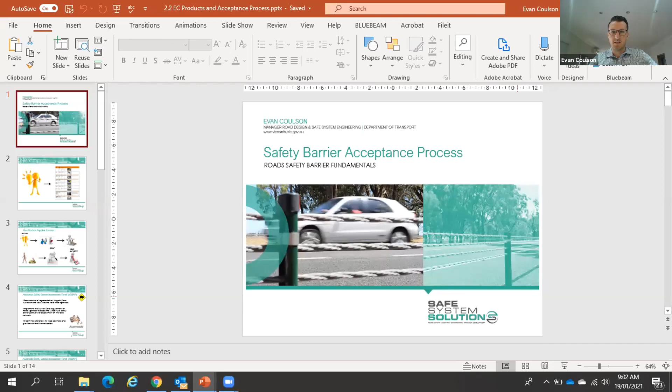No worries. Thank you, Ken. I will share my screen now. Screen share. Alrighty. And then let's get into presentation mode. Alrighty, hopefully everyone can see that.

So I've got 4 presentations, all of different lengths, but basically I'll be going over the acceptance process, what it takes to get a product from an idea to on the accepted list so that someone can use it during the design and installation. I'll then go into how we test, how we evaluate those products during the acceptance process. And then after that, we'll get into some permanent barriers, all the different types and some key features of those, and then a bit into temporary barriers at the very end.

So I do use up sort of the full 2 hours, so I apologize if I feel like I'm rushing, but hopefully it leaves a little bit of that question time in between, which I think is more useful. So as I said, how does it go from an idea to a list of accepted products? Now, this is generally the process.

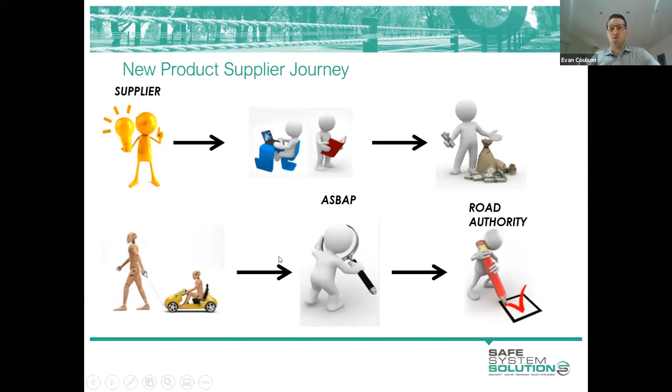A supplier, normally someone out in the private industry, has an idea. They will develop it, check the feasibility of it. They will invest heavily in this process. They will then crash test the product. So all of this happens generally by a private company. There's generally some intellectual property with it. They go away and crash test, and they package everything up and they submit it to ASBAP and then to the specific road authorities. So I'm going to talk about sort of these last 2 here mainly.

So the first one, ASBAP, the Austroads Safety Barrier Assessment Panel. So before this group was put together, each of the road authorities were doing their own assessments. So we're each checking the crash testing, checking the quality of installation, the product, how it goes together, how it could get misused, everything. And we realized it's going to be much more efficient and actually a much more stringent sort of assessment to bring everyone together and do it as a panel.

And so the Austroads Safety Barrier Assessment Panel, ASBAP, consists of someone from each of the road authorities from Australia and New Zealand. And basically we go through and we evaluate each of the new products that get submitted to us. We meet 4 times a year. It used to be more.

We found that that's probably the right balance, meaning that if someone submits a product, then it will go to pre-assessment by 1 or 2 of the experts, and then it will come back to the panel. So it can take 3 months to 6 months, depending on when they submitted it, to be fully assessed. But we feel that when it happens faster, we miss things, and we all actually have our normal jobs as well to do. So 4 times a year, and it can take anywhere between 3 to 6 months to get a new product approved.

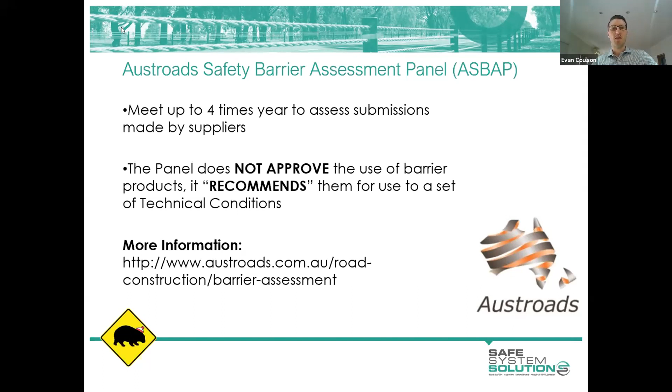The suppliers put together a pretty big package of information, and they submit it through. And basically at the end of it, if they're successful, a letter is sent to them that says, yes, your product has been recommended for acceptance. Feel free to hand this on to state road authorities. And here is a technical conditions of use, a list of values and criteria that we identified as part of the assessment, and that we think is how the product should be used to make sure it meets that MASH performance.

Now, once Austroads is done, and this is a very generic process, but it's fairly similar for each of the states. Once the Austroads assessment is done, so they've handed over a letter to the supplier, then they go and approach the state road authority. So the product or variant is then submitted to the road authority. So that could be DOT, RMS, QTMR.

The road authority does their own internal check. Does the product add value? And there are such things as too many variants of a specific product. And there are also other elements around Western Australia having very, very regional locations where they just can't attend within a reasonable time frame, and they need to be able to manage what assets are out on their network. So the state road authority asks, does the product add value on top of what they've already got?

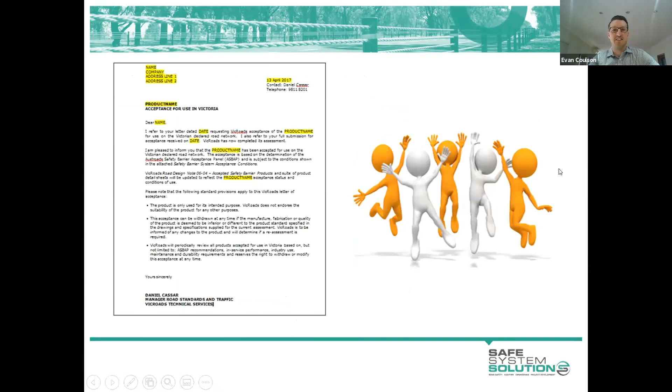Alrighty, so the supplier gets a letter from the relevant road authority. That's an example there from Victoria. They celebrate, and then it goes on to a list. And that list could be in a PDF, like I'm showing here in Victoria, or it could be on a website, like they do in New South Wales.

So the list of accepted safety barrier products is shown on the website. They have split it up by permanent, work zone, temporary, terminal, and crash cushions, gates. So they have a couple of separate areas for the different types of products, and we'll go through each of these a bit later.

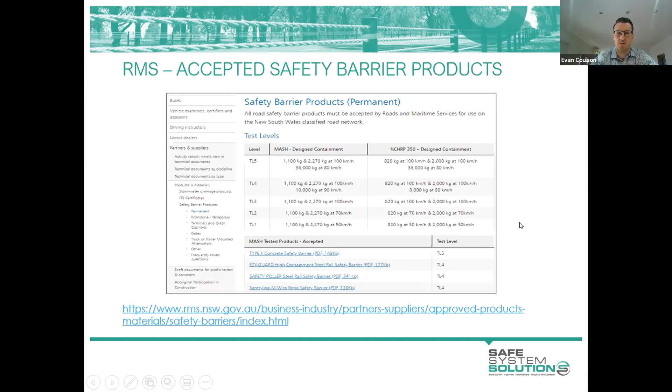They'll just have a list of the product name and the test level, and basically all of these titles link directly to the TCU, the technical conditions of use, the document that outlines exactly how that product should be used. And so here's the example.

Click on MASH TL3 Brifen, and what will pop up is the RMS acceptance conditions. Now, yes, it's New South Wales branded or RMS branded, but it's very much similar to the Austroads TCU. And it's a similar practice that we're now adopting down in Victoria, to directly link to the Austroads TCUs. Again, just a bit of saving time and a bit of harmonization benefits. But you've got your full list on the left on the website, and then you can click through to each of them, and you'll get the detailed conditions.

So in summary, with acceptance, don't use a product that's not on the accepted list. Even if the manufacturer has it up on the website, it may have gone to Austroads. There may have been some nuance in the testing where it wasn't pinned correctly, or it wasn't meeting MASH, and it hasn't been accepted. Or they just might have not crash tested it whatsoever and are claiming that this is the best product that the world's ever seen, and it does this and that. It just needs to go through the process. We need to have the relevant SMEs looking at it, doing that due diligence. So you really shouldn't be using a product that's not on the accepted list.

And if you are, you really need to know that you're taking on that assessment. You're saying, I've assessed it in accordance with AS 3845, and we'll go into the relevant standards next, I find it suitable. And I just don't think, if you're saying, well, I read a manufacturer's website or a supplier's website, that would be a good defense. So don't use it unless it's on the list. Always check the latest list. Don't modify or use the product differently.

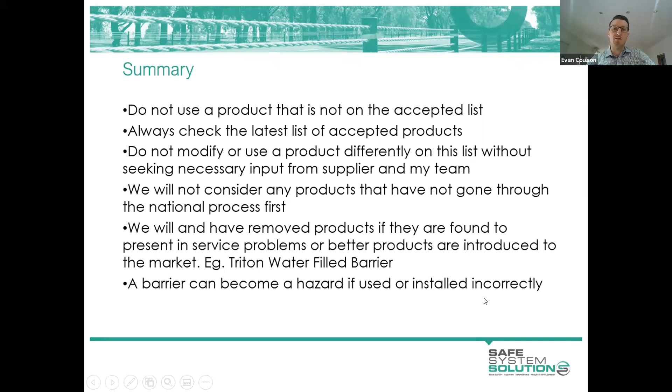And each of the state road authorities can always remove a product if it hasn't been working on site, not necessarily crashworthiness, but it hasn't been installing well. There seem to be maintenance issues or repair issues. And so products can be removed by the state road authority at any time. Alrighty, well, that is the first presentation, the accepted list.

I'll jump over to Ken. Are there any sort of questions that have popped up? No, nothing yet, Evan. Right. So keep motoring along. I think people will have some questions in some of the others.

Yep. No worries. Alrighty, so we now understand, I guess, the process for a product to get on the list. The next part I wanted to talk about is, what is that assessment? What performance are we checking for? What standards are we checking to? What are we actually looking at as part of Austroads, ASBAP, or as part of a state road authority? And this is the bit where I'm going to get into a bit of crash testing and the terms of MASH and 350 and stuff like that. So how do we determine if a product actually redirects and contains a vehicle?

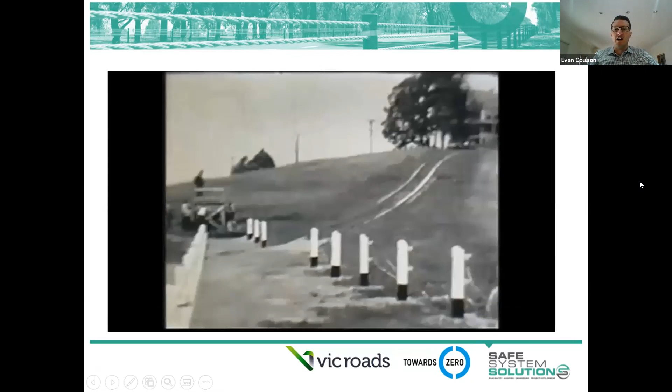Now, hopefully for those that have a good internet connection, this is a video of some very old crash testing. It's basically showing a black and white video of a car rolling down a hill and hitting what looks like a wire rope safety barrier, or a couple of posts with some cable joined between them. The principles are really still the same. What vehicle do you roll down the hill? What speed do you try and achieve when you hit the barrier, and what angle?

And, you know, they've made those subtle decisions when they crash tested that. Yes, it's pretty primitive. They've just rolled it down a hill, but they've still made those three key decisions. They've chosen a vehicle type. They've tried to achieve a certain speed, or it could have just been how big the hill was. And they've chosen an angle. They've installed that barrier that way so that the vehicle would hit it at a certain angle. And that is essentially the main matrix of tests, a combination of different vehicle sizes, angles, and speed.

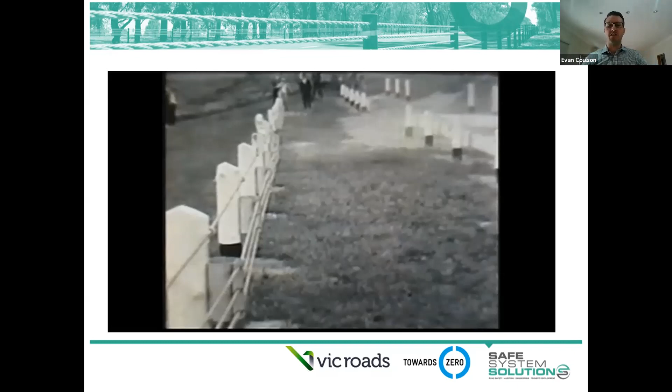So where do we get this information from? Now, there have been crash test protocols, so how you crash test a product, around for a while. However, the names or the initials that you'll know the most are NCHRP 350. So this was a report completed in 1993 to look at an updated protocol.

And finally, MASH, the Manual for Assessing Safety Hardware. And these would be the latest. The first version was out in 2009, and the second version out in 2016, with some minor additions to wire rope and wire rope on verges. So nothing major, but just trying to, I guess, extend some of those unique installation scenarios.

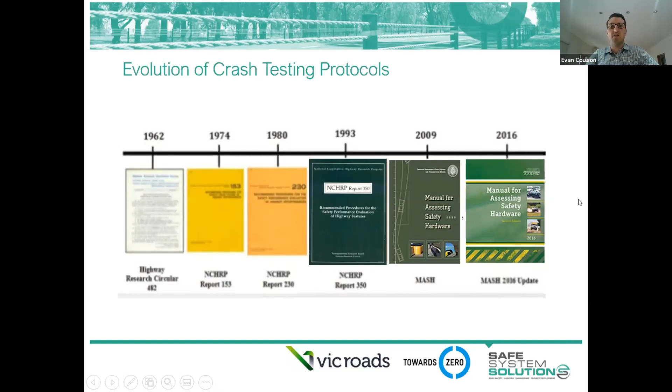These are the protocols, and these ones here that I'm actually showing are just American ones. And we use these, but we actually need something to bring these all together and say that we use these. Australian Standard / New Zealand Standard 3845, which is road safety barriers. This is the document that pulls it all together.

This document talks about how to determine if a product or a barrier is suitable. It talks about the testing and how you need to install it and everything that should be evaluated before you accept a product. And we use, or Austroads use, this standard very closely. So our whole evaluation process is set around this, and it does go into a lot of detail.

However, it does reference three documents: NCHRP 350, which was that American crash test protocol from the last slide. It references MASH, and it also references the European standard, which is EN 1317. It does call MASH out as the basis. So as the new update in 2015, it says MASH shall be the basis for all testing and evaluation. However, it will consider products that have been tested to these other manuals.

Now, why use an American or a European standard? Why not go away and develop one ourselves? Well, the reality was that most of these companies designing or innovating new products are in America and in Europe. That is where the market is much bigger. That is where they see the profit for their investment.

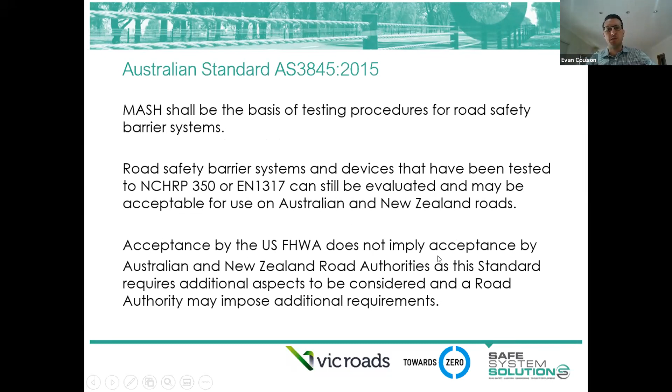The FHWA are assessing a product to their standards. They're not saying that it meets AS 3845. And so we really need to make sure that that check is done, which is why Austroads ASBAP has been set up.

Why do we crash test? Well, really, we want to understand how or if these products are likely to work in the real world. Now, there are infinite possibilities out on site. A range of different vehicle types and sizes and weights, a range of speeds, a range of angles. We can't crash test everything or every scenario. And to that extent, it means that not every product is perfect because it hasn't been tested in every possible scenario.

What these protocols do is they set practical worst case scenarios. So they try and set an upper limit. What is the reasonably large vehicle, reasonably high speed and high angle? And what it also does is that each of the products are tested consistently. So we can have some comparison, some understanding about how concrete works versus wire rope or guard fence, because they're being tested in the same way. So the reality is that these protocols set that limit, and if someone can pass that, then we're pretty comfortable that they can pass a worst practical case.

So how do we crash test those three components? Vehicle. Now, how do we pick a vehicle? This diagram up the top shows some data from Victoria from a couple of years ago. And I guess it's just useful to highlight, and you'd have similar graphs in other states and probably similar graphs in the US, but this is a graph that shows vehicle weight on the bottom here, so 0 all the way up, and I haven't extended it, and the amount of registered vehicles.

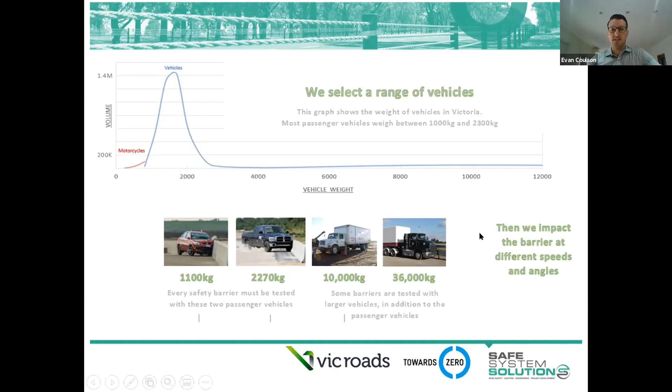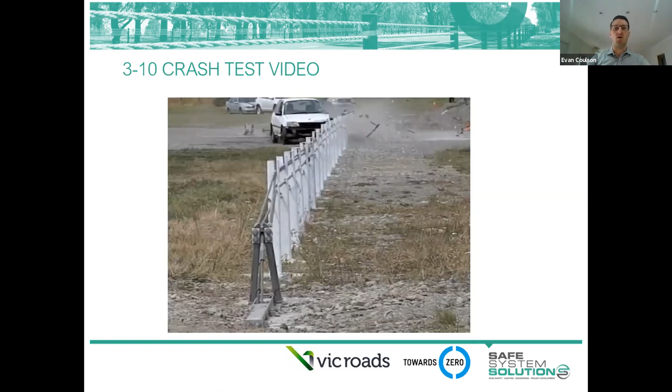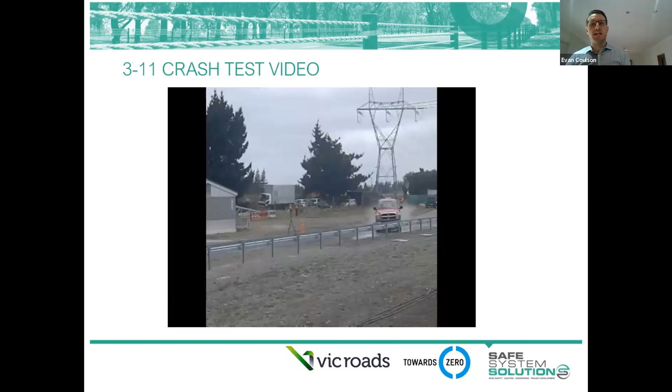The next one, the large passenger vehicle or SUV. We can see a difference from NCHRP 350 to MASH, taller bumper height, larger weight. And again, this is testing that maximum sort of load from a passenger vehicle. It hits high, it hits with a large amount of energy, and it's the most likely, unless you start going to TL4 and TL5, to breach through or overrun the barrier. So hopefully with those two tests, we know about underrun, we know about overrun, and we've also tested for that sort of large impact energy.

Once you move above that, we go into the 8-ton or 10-ton now. So TL4 has gone up, and then into the 36 tons. So there is a TL5 and a 6, and I think I'll come back to that in a minute. These are two different tests. So there's the 36-ton trailer truck test, something like this over here on the right. And there's also a level above that, which is a 36-ton tanker. And while their weights are the same, their behavior during impact is different.

This one on the bottom right, which is the TL6, the test level 6, has a movable liquid load. And so when it impacts the barrier, it actually behaves quite differently because you get these multiple impacts. You get the front compartment impacting, the back impacting, and then as all that load flows across into it, you get that third very high impact, which is much more likely to tip over a shorter barrier.

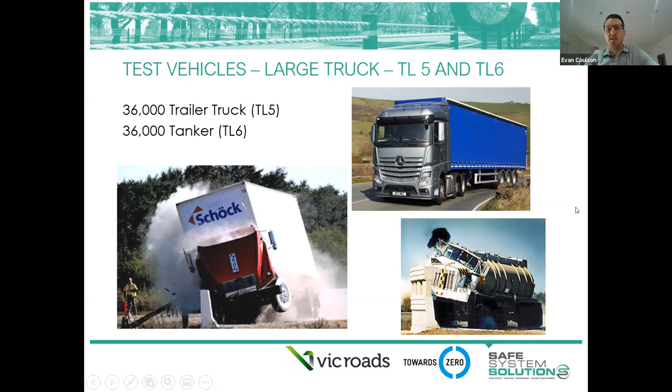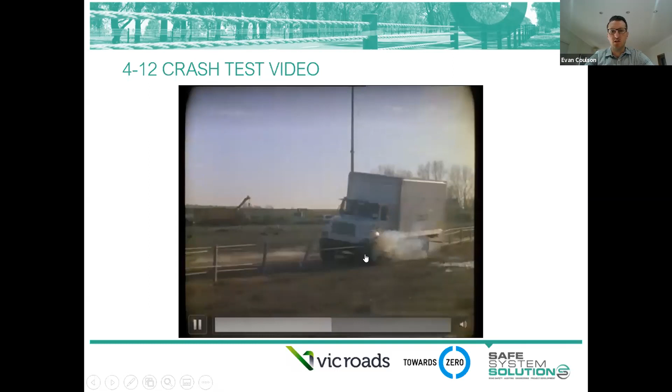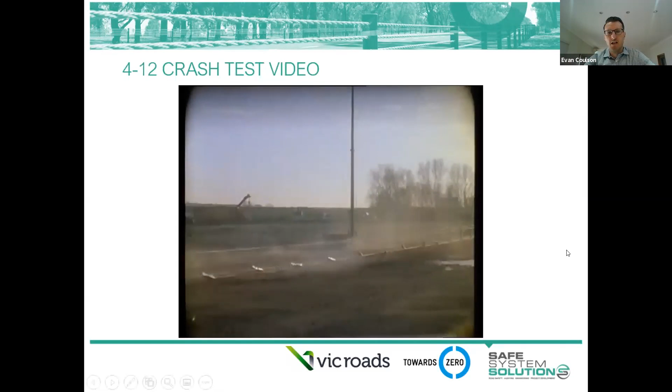For other than concrete, the only real products that get to TL4 are your Thrie-beam and your wire ropes. The idea being that you can spread the rope out, spread the contact area around. You're still protecting for the small car, but it's still tall enough to protect for those larger vehicles. That's one of the big benefits of wire rope, the fact that you can spread it out and capture a range of different vehicle shapes and sizes because of how far apart you can get the top rope and the bottom rope.

We pick an angle for each of these: 25 degrees for the 2 passenger vehicles, and slightly lower for the trucks. These angles are based on the protocol, and the protocol is based on crash statistics. America looked at 4,000 runoff road scenarios and found these angles were the worst practical cases. Yes, you get some angles higher than this, but most, that 85th percentile of runoff roads, leave the road at around 25 degrees.

So putting those together: TL1, the 2 passenger vehicles at 50. TL2, the same 2 passenger vehicles at 70. TL3, the same 2 passenger vehicles at 100 - this is the most common crash test that people are aiming for. TL4, you still have to do the passenger vehicles at 100, but you add on the 10-ton truck at 90. TL5, passenger vehicles at 100 and add on the 36-ton truck at 80.

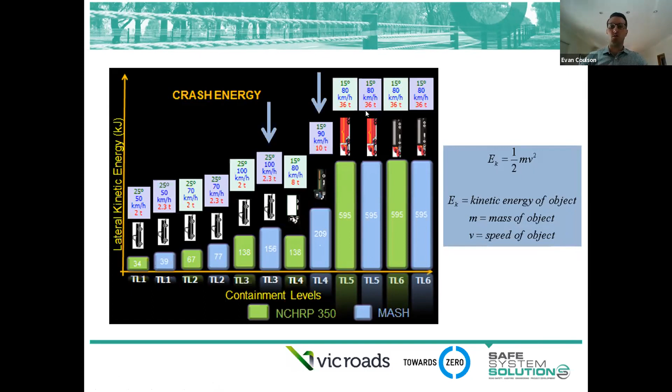Now, I talked about longitudinal barriers. So all those tests before about the small vehicle and the large vehicle, the speed and angle, that's just for the midsection of the barrier. There's a whole new matrix for the terminals. Same principles: small car and large car, straight on, at an angle, at the critical impact point - the place that creates the highest occupant risk or severity - and the length of need, where that terminal begins to redirect. I'll go into that a bit later throughout these slides.

And then on the reverse - if you're going from something stiff into a flexible terminal, not an issue - but it's where we go from a flexible barrier into a more rigid terminal that you get this effect called pocketing, where they're coming in, it's deflecting, and they might be dragged into a rigid back. That could be a crash cushion on a plastic temporary barrier. That combination would just not work, because the plastic barrier deflects and it would be coming in right into the back of that pinned crash cushion. That's why that combination isn't accepted, because they just would never be able to pass test 3-39.

So again, a big matrix of tests for the terminals. Similar with crash cushions, the only real difference here is that it adds in a 20 degree as well. Because these are generally redirective right from the beginning, there is this 20 degree angle impact right on the nose. Whereas in the previous ones, there is an assumption that it would just sort of go through the barrier or through the terminal. So 15 degrees actually has the greater risk being passed on to the occupant, whereas in a crash cushion, 20 would be the worst.

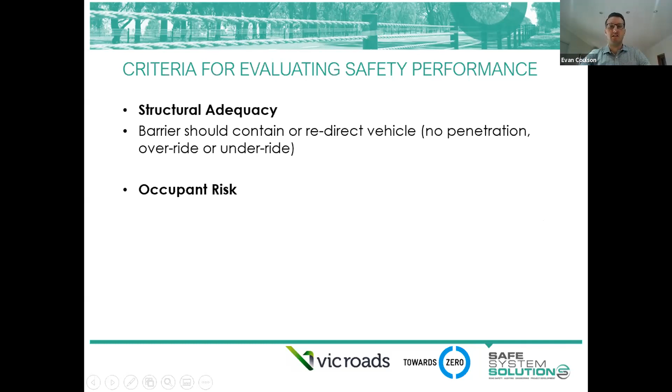The second is occupant risk. Does the driver, or do the other occupants in the vehicle, actually survive? We measure this using gyroscopes and various instruments throughout the vehicle to make sure the compartment isn't breaking, there aren't any bits spearing into the occupant compartment, and also that the occupants will survive the deceleration - the G forces on them as they go from 100 Ks down to whatever their exit speed is.

And then finally, post-impact trajectory. Does the vehicle leave the barrier after an impact at a reasonable angle? It's preferable that the vehicle trajectory does not enter the adjacent lane. So it obviously has to leave at some angle - you can't just have it stop against the barrier. But we do require that it leaves the barrier at a reasonable angle and isn't likely to head off into the opposing direction or travel lane.

So for structural adequacy, obviously this one on the left here would be a clear failure, but we're also looking at whether it's on the peak, or on the very brim, of a fail.

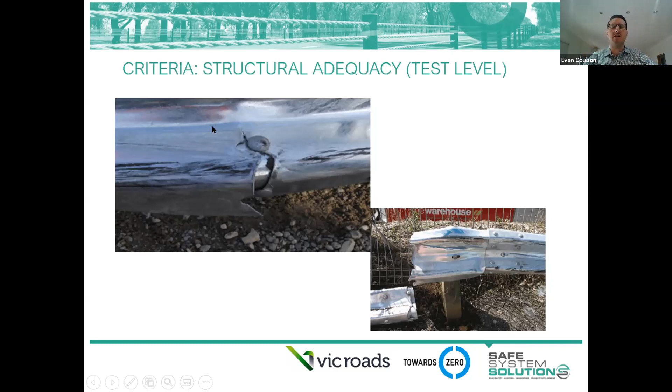If a crash test was like this, you'd question whether it's likely to do that for slightly larger tests. And yes, the supplier is to some extent designing the cheapest barrier they can to pass the test. That's what everyone does. We've given them the goalposts and made them fairly hard, and they design a system they believe is sellable and cost effective that meets those goalposts. But we still look at how close to the bare minimum they've tried to design it, so structural adequacy, occupant risk.

This video I think we showed before. We're looking for a couple of things: detached fragments, do they enter the compartment? Does anything spear the compartment? How stable is the vehicle? And also, does the vehicle meet its deceleration rates?

There's a diagram in the next one. We test for two things: occupant impact velocity, which is when the vehicle first hits the barrier and the occupants are thrust forward, either hitting the dashboard, steering wheel, or side of the vehicle - is that survivable in itself? And once they've become part of the vehicle, does the whole vehicle decelerate at a reasonable rate?

The one thing I wanted to highlight is we've got preferreds and maximums for each: 9 meters per second, 12 meters per second, and 15 Gs and 20 Gs. Yes, there is a difference between systems - wire rope versus flexible W-beam versus concrete. Wire rope gets roughly half of concrete, similarly with occupant ride-down Gs. However, I wanted to highlight we're still well below preferred and maximum. Concrete gets values up around 6, well below preferred, and 12 to 14 Gs, still below preferred. So while wire rope is the most forgiving of all of them, it's very unreasonable to say concrete is dangerous or unsafe, because it's still well below preferred and maximum.

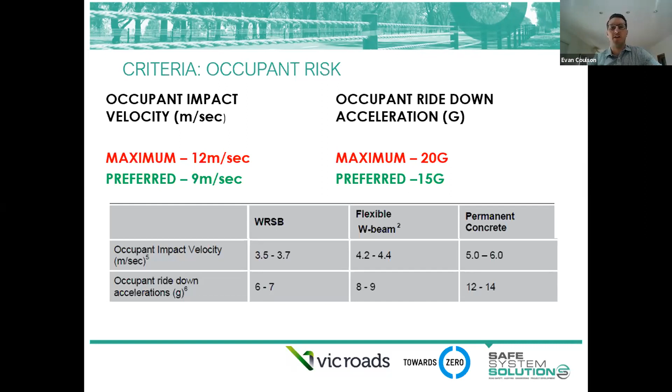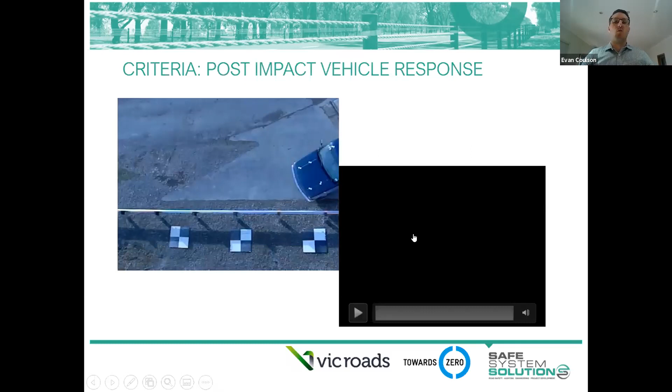I've got some videos here - I guess this one doesn't really add much. The one challenge with post trajectory is that when we crash test, we're simulating that someone's let go of the steering wheel, and they don't brake yet - they brake around 2 seconds after they leave the barrier. So we've seen the post trajectory, where it goes after. But in the field, often what happens is someone will impact the barrier and then naturally turn the steering wheel as far right as possible, and that creates this post trajectory, not because the barrier has really caused it, but because of that combination of the driver hitting it and turning their steering wheel. I will admit that's something that's a bit of a gap.

A lot of reports will come in and say the barrier has bounced someone away, and by all means it does look like that - you can see the tire marks, the steering is fully turned to the right, and they've flown off away from the barrier. It is very hard to be able to test for that. All the protocols and earlier data are really just assuming the driver has let go, impacting the barrier without any intervention until they've left it, when they can slam on the brakes and bring the vehicle to a stop.

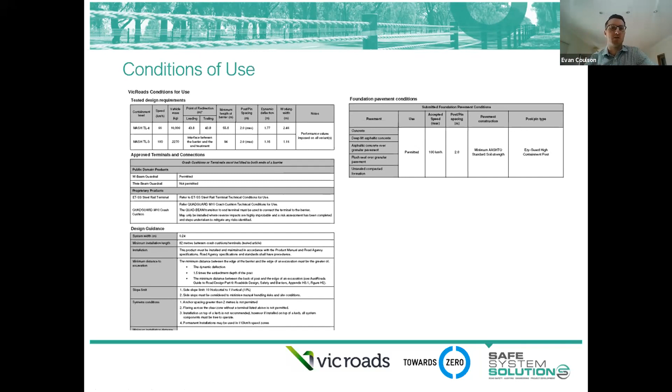Most of the time, when we look at MASH TL3, the deflection is very similar to the working width. And that's because there's very little roll. The vehicle doesn't lean, and so you end up getting a deflection that's almost identical to the working width. Whereas once we start testing higher or taller vehicles, we will get a difference. The barrier cables might be down around the bottom of the vehicle at the wheel, whereas the vehicle itself is leaning beyond those cables, and we do get a slightly different working width and dynamic deflection.

So, Evan, questions coming from Mark. Is there any vehicle technology emerging to tackle post-impact trajectory, something like locking the wheel upon impact? Have you heard of anything in that space? I haven't actually. A lot of the discussions have been more about how do we set these barriers up to talk to the vehicle, or for the vehicle to be able to detect and avoid the impact, and other technology about how do we communicate when a barrier is being impacted. But no, I haven't heard about a technology to treat that.

A lot of the road authorities have started talking to the manufacturers of autonomous vehicles and are working through some of those challenges out on the network. So that might be an interesting one to talk through: if it does happen, yes, we're doing everything we can to try and avoid a crash, but if it does, how do we best endure the crash? And it could be the same with lots of different furniture. So yeah, good question, but I don't have an answer, sorry.

While we're having questions, Mark asked yesterday about network road risk intervention thresholds and the activity going on around different jurisdictions. Do you have any updates? Yeah, so we did share notes at the last ASBAP. While the people on that group aren't necessarily the ones developing those thresholds, we do get involved in part 6, and so we did have a chat about it. From what I could see, Queensland had done the most pre-work, though they hadn't yet released the final report, but they were on track hoping for one value to rule all of their network.

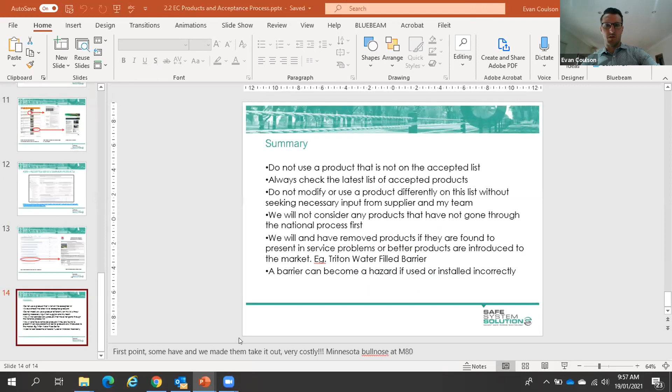That's the one. All right, we'll end the polling and share the results. And yep, most everybody was on it. I managed to trick a couple of people there just on some things that sound like they could be right, but technical conditions of use, as Evan mentioned, and the Austroads Safety Barrier Assessment Panel. I popped in there the Austroads Safety Standard Barrier Assessment of Products, which is, yeah.

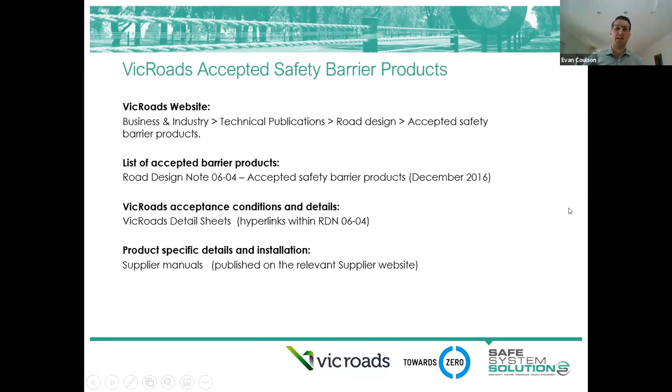So in this session, I just want to go through the general categories of permanent safety barriers. Now, I'm not going to go through specific deflections and working widths and minimum lengths. That's, I guess, what the TCUs are for. Let me skip through some of this. But I want to sort of go through the general pros and cons and unique characteristics of each of the different barrier types. And really just to get you guys familiar with the types so that it's a much easier process to go away. You'll see them in the accepted list. You can pull up the TCUs that give the certain values. But you kind of know generally how they work.

So I had structured this off one of our own. Whoops, I threw my mouse across the screen there. I have structured this similar to our list of safety barriers. So generally going through flexible, semi-rigid, terminals, and then into some of the unique and permanent concrete. But like I showed before, RMS does split their documents slightly differently, but nonetheless, the specific products are the same. So the first thing I wanted to talk about, proprietary versus public domain. Now, proprietary products infer that there's intellectual property.

So a supplier, a company has invested the money, they've designed the product, they've crash tested it, and as such, it must be purchased from them. Public domain, on the other hand, implies that anyone can manufacture it as long as they manufacture it to the right standard. And a classic example of public domain would be your G4 guard fence. It was crash tested, it was designed by a road authority, and therefore the road authority really just gives the details and says G4 is accepted, here's how you manufacture it, here's how you install it. And anyone that can manufacture it can do so.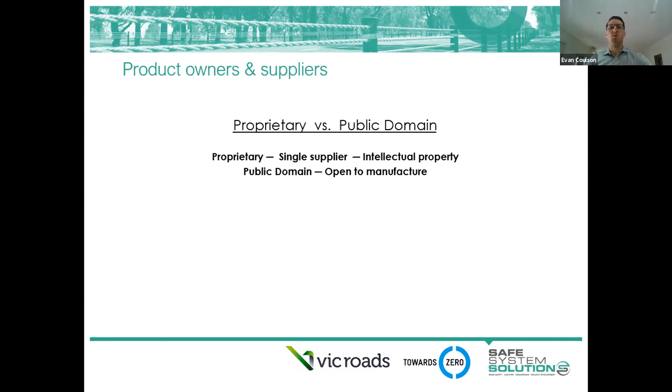In the last 10 years, we are shifting much more to proprietary systems because they can develop that business case. They can actually show the investment and they'll push innovation much faster than public domain can, given we need to put a business case and convince the road authority that it's worth it. But I will try and highlight which ones are proprietary and which ones are public domain. So wire rope, first cab off the rank. I wanted to go through the general components of each of them.

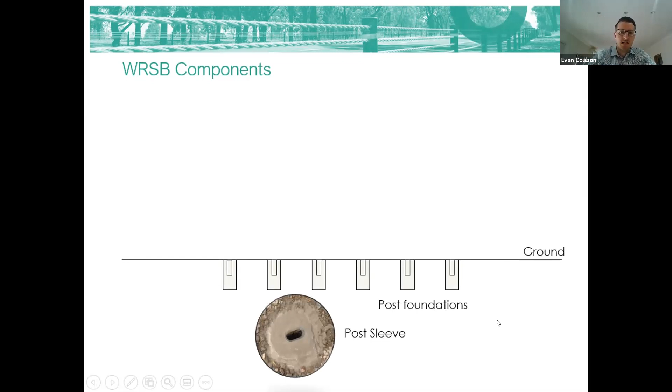Each wire rope product has concrete foundations. Now the sizes might be slightly different. Most of them I think are about the same: 300 mil diameter, 600 mil deep. They then each have a plastic sleeve that gets pushed into the concrete foundation after it's just been poured. They then have a steel post that slots into that. So there's nothing really holding it down. It just falls down into the post sleeve. And the shape of this post is slightly different, but generally around the same, 150, 200 mil wide. And there's generally got slots for the cable.

Then there's the ropes. All the ropes are pretty much exactly the same for each of the wire rope systems, it's just how they connect or how they weave around the posts. They all then have a terminal and a ground block. So the anchor block, very important, holds that cable down during an impact. The way that they transition down is slightly different. We used to have no posts, which was not good. We've gone back and they figured out how to achieve that. So there's generally either a couple or an array of posts that reduce in size. But generally a wire rope system looks something like that.

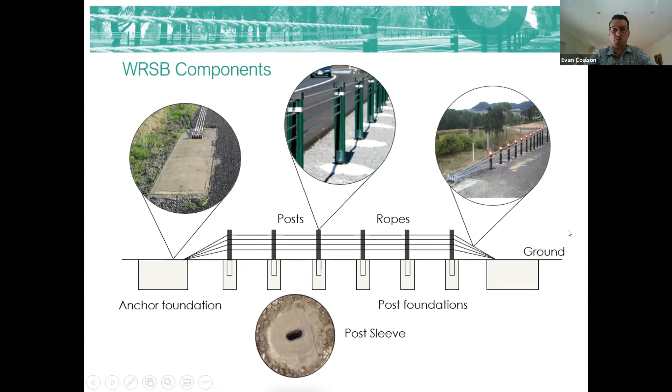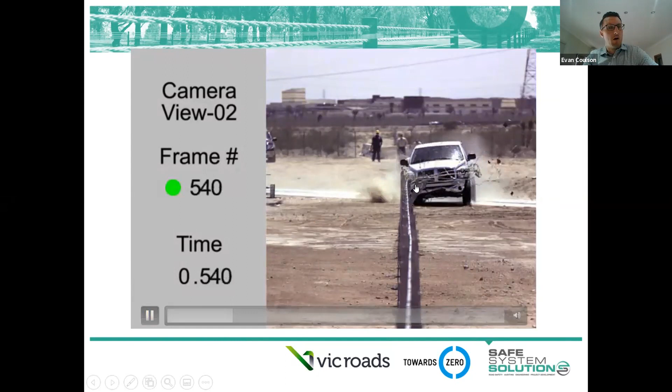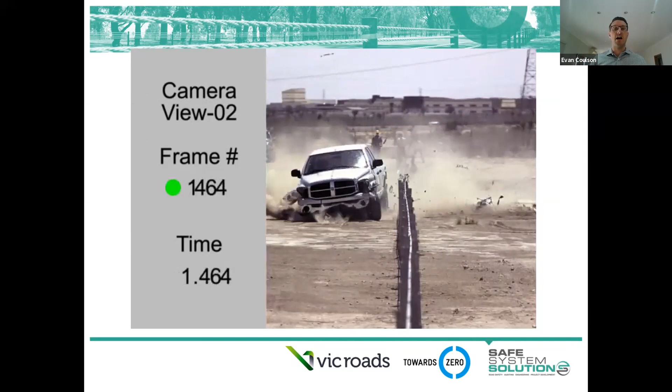And so with this in mind, the more posts, the stronger the resistance because there's more posts to pull over as the cable deflects. Less posts means that there's far less resistance on the cable. The barrier would deflect quite a lot and potentially the cables would even drop down or come over the top of the vehicle because there's no posts holding the cables in place. So there is some theory going around that you could just make the posts out of anything, they don't do anything but hold up the cables. Entirely incorrect. The strength and how long they hold those cables before they release is pretty much what makes up the cable, and as such is what makes up the IP. It's all around that post interaction with the cable. The cable you can just get from anywhere. It's all around that post.

Now we've moved from 350. So I only wanted to introduce some of the new MASH wire rope systems. We currently have 3 MASH wire rope systems. The suppliers are the same as before. They've got their same sort of companies over in America and Europe. Brifen MASH, so this one is from Safe Direction. Again, we've got a round post and we've got a bit of a weave. We've got the Sentryline-M, a MASH wire rope from ACP. Looks kind of similar to beforehand, with the clips or the arms on the outside that hold the cables, with one sliding down the middle.

And the last, MASH Flex. So that's the old Flex fence, now called MASH Flex from Ingal. Their post does look very similar. However, they've taken on board some of the comments around how long it takes to add in each of the spacers, and they've integrated a post cap as one unit, which acts as the spacer. So they're trying to save some time in installation. But each of these are MASH tested and approved. The only one currently that is TL4 is actually the Sentryline-M. Now, I'd imagine each of the others have plans and are submitting those, but right now the Sentryline-M is the only MASH TL4, but all are MASH TL3.

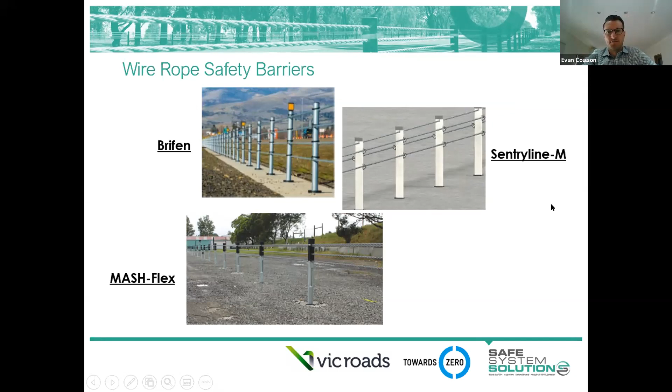Benefits of wire rope and limitations, very similar to beforehand. They are the most forgiving. Occupant risk values are the lowest, not the only ones that are below the limit, they're just the lowest. You can get quite high containment. So one of those, Sentryline-M, TL4, but they do have this extra capacity.

The cables can take quite a large energy or impact force before they get ever close to snapping, which means that we've had lots of scenarios around Australia where very big vehicles have impacted, the cables have engaged, and while there's lots more deflection, they were able to actually redirect that vehicle. So one of the benefits is this higher containment, even sort of the 3 to 4 and a little bit more. Low installation cost, low repair cost, narrow system width.

Now, I will distinguish low repair cost from low routine maintenance cost. Unfortunately, the cable barriers will require visual inspections to make sure the cable's not sagging, to make sure that the tension is where we want it to be. So you're kind of saying it's low installation, low repair cost, but unfortunately does require that extra inspection.

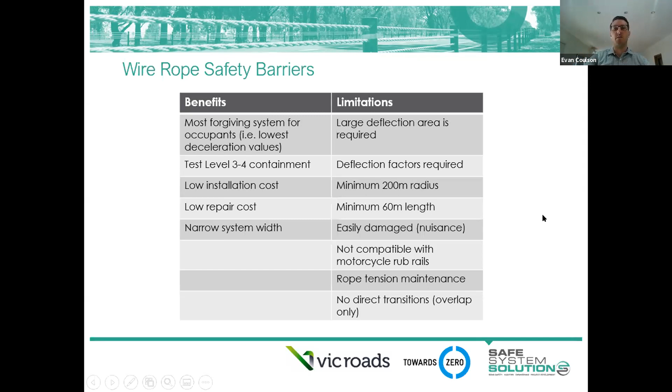Alrighty, next category, flexible guard fence. We've called it flexible guard fence down in Victoria. The other common term, weak post guard fence or weak post W-beam. The reason for the weak post, not that it would yield if you kicked it or tried to push it. It's actually still quite strong, but it's the way that it behaves. When the vehicle itself hits the post, it will bend. And the idea is that it bends and the W-beam releases from the post, and the W-beam stays at the right height, while the post bends over.

And similar with the wire rope, same behavior. The post of the wire rope will bend when it's directly impacted. The cables will release, and the cables will sort of stay up here next to the vehicle until it gets redirected. Obviously, the posts up and downstream will add that resistance, but we call it weak post because each individual post is not directly resisting the impact load. It's kind of acting as a ribbon.

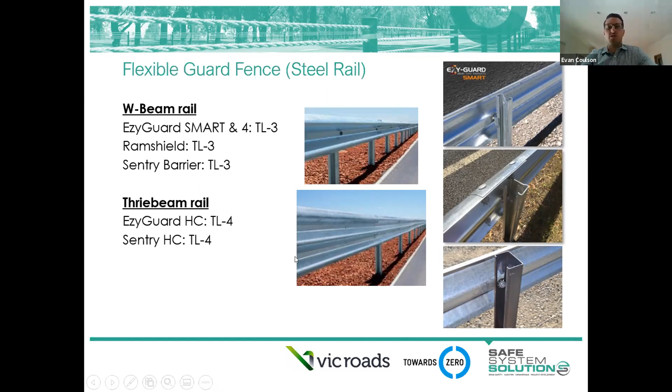So just having a quick look now, from what I've explained, you're going to quickly see these posts, because they're being directly impacted, likely to bend over straight away and release from the rail. We don't want to pull the rail down so that the vehicle comes straight over. We need to release from it. And then you'll sort of see these holding up until the vehicle eventually gets to these. And the W-beam hopefully staying along the edge and engaged with the vehicle the whole time.

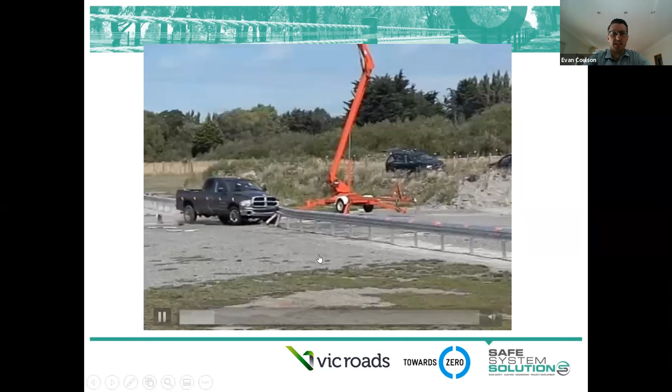And so that's what we can see. The posts are bending. I go back. The posts directly bend over. The W-beam releases from the post, stays with the vehicle until the energy has been redirected. Different angle. Again, seeing the post pull over, releasing as they go, and the W-beam staying engaged well with the vehicle.

Useful place for W-beam barriers. Yes, that is a useful place. You've got these rural or mountainous roads where you've got lots of curves. Yes, it can go around tighter curves. But I guess also, quite useful in the constrained locations. You've got a bit less deflection than wire rope. You've got no factors. You can make this as long as you need and the deflection won't change.

Obviously, you need to consider access and having emergency breaks, but in theory you can have it as long as you need. Tight curves, damage is localized, so there's no tension to be affected. It's just going to be the W-beam systems in that spot that will need replacement.

And then the other key here, transition to other barriers. So you could directly connect to a Thrie-beam, back down to W-beam, onto a concrete barrier, so you can create that consistency. And the other thing, motorcycle rub rails, these systems each have a rub rail that goes underneath that has been tested and designed to redirect a sliding motorcyclist.

Unfortunately, we don't have any products like that for wire rope, but also wire rope's less likely to be in the locations where motorcyclists are coming off on tight curves and sliding. So again, a really big benefit of these systems. And if you do have roads that have a high risk of motorcyclists leaving the road, then these flexible guard fence systems are definitely the better choice.

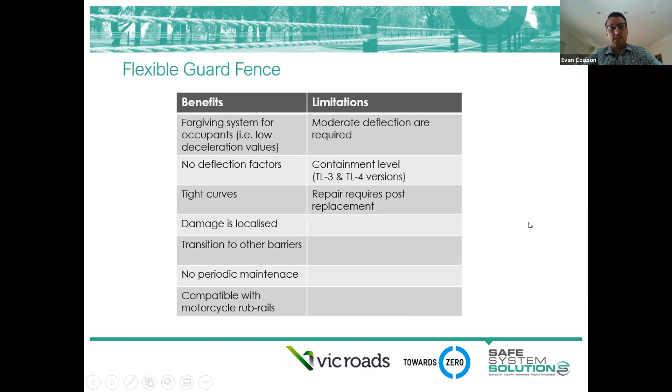The semi-rigid barriers, or commonly called strong post, the main difference being that each post will resist that impact. If the vehicle comes in right here, it's not plowing over this post. This post will resist for quite a bit longer to a much higher load limit until it begins to bend.

And so the types of products that fit within this category are your G4 barrier, which is here behind the kerb. This is type B down in Victoria. Your roller barrier, again, still some deflection, but we've got these posts and a rail connecting each of the posts. And if a vehicle hits, there'll be only a little bit of deflection, but it is still considered a strong post system.

And this is the old T39, which I know we removed in Victoria, but I can't remember if other states, but I know there is definitely the G4 modified, or is it G9 modified, which is the Thrie-beam strong post with quite a large block out on that. So that would also be considered a semi-rigid or a strong post system.

Why use these? Lower deflection. We can protect hazards with much less room.

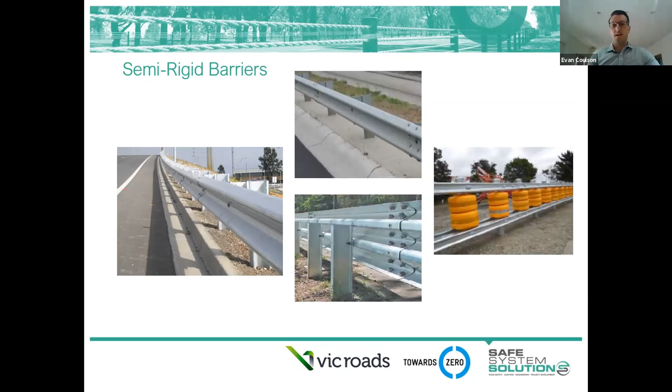A couple of little variants I wanted to mention, which are common with all of these systems. Some have been tested, some have been simulated, and others were just accepted a while ago based on theoretical work: post spacing, base plates, post omission, double blockouts, and double nesting. I think I've got an image for each of these.

So, post spacing. Most of these systems are tested at one post spacing, and therefore you use it at that. For guard fence, it's 2 meters - all of them are pretty much 2 meter post spacings. For wire rope, though, it varies between 2.5 and 3. Again, the supplier has this tough decision of, do I want to be the cheapest product, which means fewer posts, or the product with the least deflection, which means more posts? So some of them have crash tested with different post spacings.

In Victoria we've tried to harmonize that by just adopting a 2 meter and a 3 meter post spacing, just for simplicity. It's easier to specify wire rope on the plans rather than having to specify one specific product. But post spacings can be varied, and you can reduce your post spacing for short sections to get past a hazard that's really close to the road. Generally you want to use the post spacing that was tested, but reducing it is useful in constrained locations.

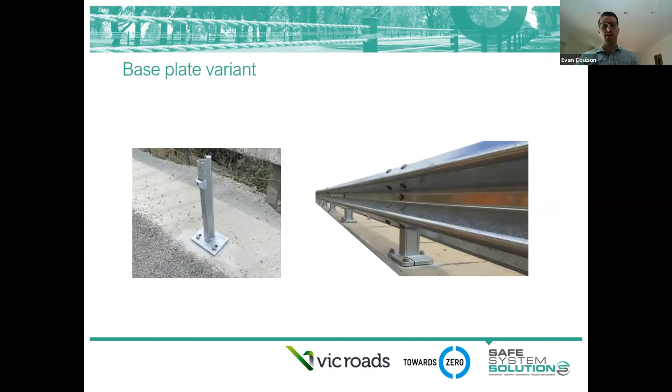The other one that's popping up is post omission - basically the idea of leaving out a post to span a hazard, culvert, or service. This one's actually the Ramshield, and they tested 2 posts missing. They basically move the post over in between the other 2, so they make it a bit stiffer at each end, but it allows them to get a 6 meter span.

Quite useful. And this other thing, the Abraham block and the EzyLift - some systems have acknowledged that over time we add overlays, we add different treatments to our pavement. So to make sure we can adjust the height of the barrier to match that, because you don't want your barrier installed and then all the vehicles essentially being lifted up so they hit higher on the barrier.

We have the Abraham block, which can be attached to some of our public domain guard fence, and some suppliers like EzyGuard have added this EzyLift. In the case of Ramshield, they just simulated it at all different heights, so they've proven that their typical installation height is actually quite high but it still works. Therefore you can adjust it a certain amount before it begins to fall out of tolerance. They went the opposite direction to adding an actual physical change to the barrier.

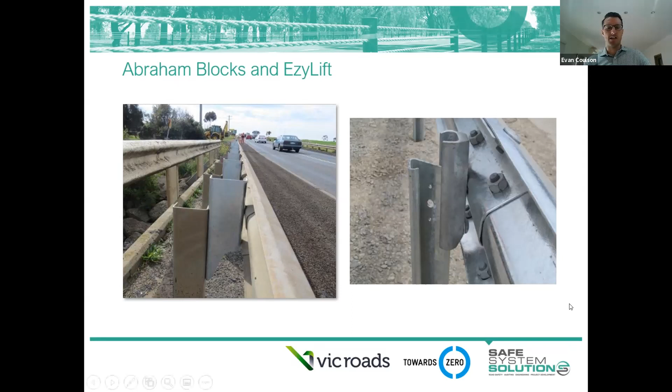Alright, let's keep moving - terminals. Wire rope terminals, there's really not much to say about them. They essentially go from the full height post down to the anchor. The amount of posts, the height and angle all depend on the specific product. They've been crash tested head on, and yes, the vehicle ramps up - there's no real other way to do it. But it's all about these posts breaking over and the vehicle eventually comes to a stop. If you hit right at the angle, you'll go straight through because it's a gating system, but otherwise, if you hit at an angle or head on, you're not really losing that much speed.

Guard fence terminals - the images I've got there are the MASH terminals. So we've got the MSKT, Safe Direction, the ETSS, and then the max tension systems are the same suppliers again - Ingal, Safe Direction, ACP. The value of these over the wire rope is they actually absorb energy, which is nice to know if someone's running off the road and hitting the terminal - you've brought them to a stop before they've progressed beyond. Some of them do have shorter length versions for TL2, 70 K's versus 100 K's. So they're essentially one for each of the guard fence systems.

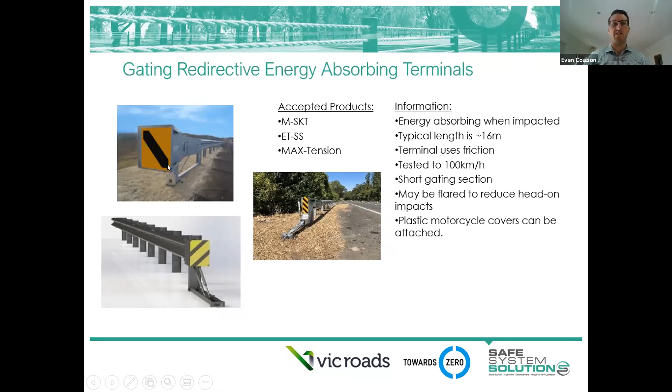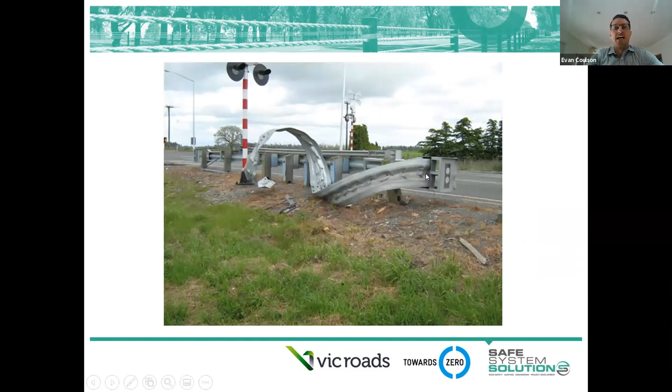The extruder system, the MSKT - these gray lines represent the W-beam, the rail. During installation you place this terminal head onto the end of the first W-beam system. When someone comes along and impacts it, it slides along the W-beam and pushes it through this tight little width, and that absorbs energy. By the time you've pushed it all the way through the first three rails, it's shot out, it's absorbed energy via friction. By the time you get to the full length of the system, you've absorbed enough energy to bring a pickup truck to a stop. I do have an example of one fully impacted and redirected - obviously this W-beam was all straight and it's shot out the end of it here. Which means the most critical thing with the extruder terminal is getting this terminal head onto the end of the W-beam. If you ever see a W-beam sitting out or not sitting inside the terminal head, then it's not going to extrude - it's not going to push the W-beam through the terminal head.

The other version is called the tension system. Basically this has some form of continuous unit, whether that's a cable or the W-beam itself. It's anchored at a post that's actually further forward than the head that you see. The cable anchors itself there and runs through the terminal head, so that when it gets impacted, the terminal head holds onto this and pulls along, and by doing that absorbs the energy through friction again. The W-beams generally concertina over each other, so you end up with a couple stacked on top of each other after a big impact. But the key is that it remains taut, and that terminal head is pulled along all the way from where it was, absorbing energy until it finally gets to its end.

Again, the most important thing here is, one, that the cables are actually anchored and don't pull out during an impact, and two, that there is a locking system here, to make sure that these systems are actually taut and grabbing onto the cable so that it absorbs friction during an impact.

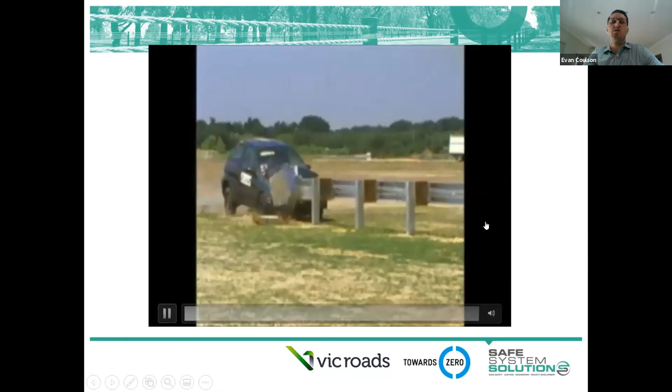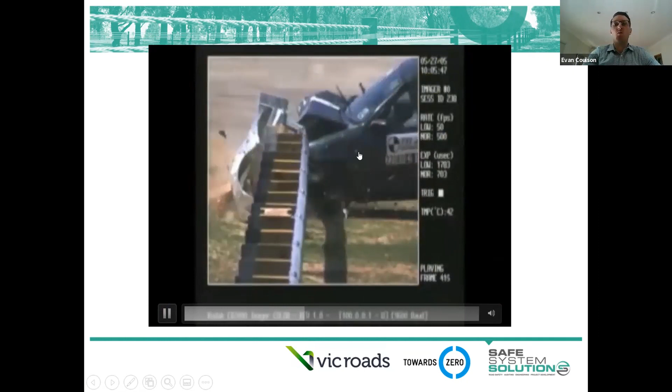I think I've got a video of one of the older products, the ET-2000. Again, you see the vehicle come in and it shoots out of that terminal. It's sitting on top here, and as it pushes out, it's going to send it out. Eventually, the amount of energy needed to push through will be less than what the vehicle's providing, so the vehicle will come to a stop and rotate out of the way.

The benefit of these is they're standalone. They're crash tested to 100 Ks. You can make them longer for greater speeds. They can sit on the end of a rigid barrier. They're quite short in terms of things. For 100 Ks, you only need around 9 meters.

Versus a guard fence, you would need the terminal, 16 meters plus a transition to get to concrete. You could put these on the end of a pier or a hazard. So they are quite versatile and perform very well. The downside is they're quite expensive, so really we'll be using them for places that get impacted a lot: gore areas, off ramps, highways, or just really constrained locations where we couldn't get a normal barrier in.

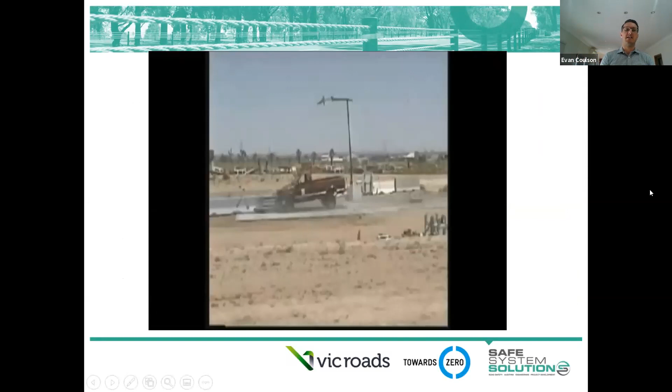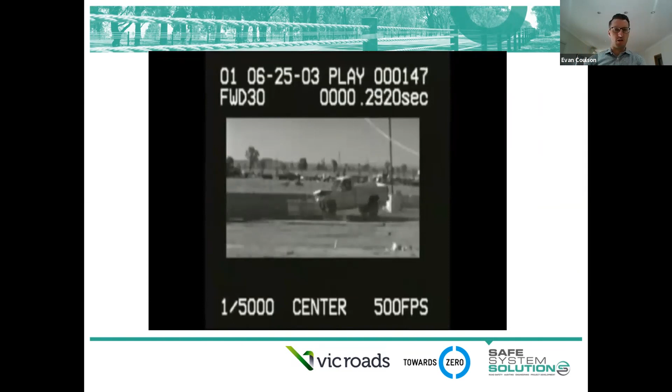I think I've got a few photos coming up, but here's a photo or a video of one. Just to show, 100 Ks an hour, 2-ton vehicle, it is a quite good impact. The occupant values are obviously recorded and they are below the maximum limits. But that's how they concertina over, the cartridges inside will absorb the energy as they break. So most systems have cartridges in each of the units, and they will crush and absorb energy.

The other option is this hydraulic piston system. There's one product out there called the SMART Cushion. It's a bit more expensive than the others, but the value is that there's no cartridges. All of the energy absorption is done underneath, which means if you need to repair it, you're only replacing a couple of bolts and resetting it. Whereas if you need to repair a cartridge system, you've got to buy new cartridges each time they are damaged.

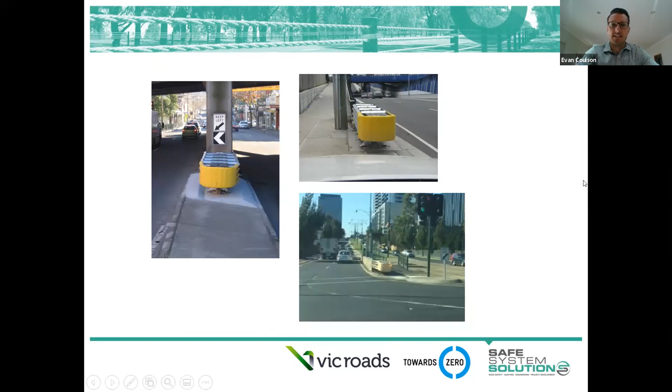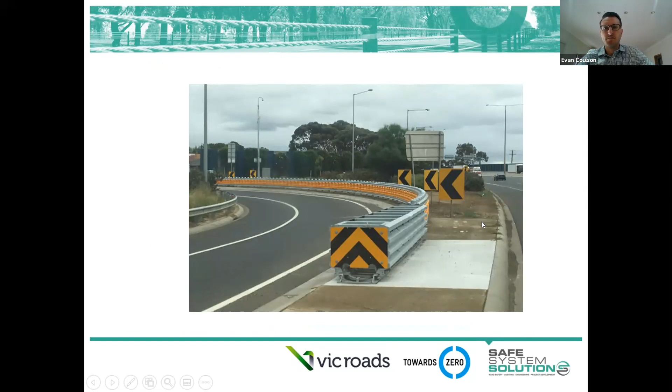You can get some wide variants. Again, you just wouldn't have the room to extend this barrier up into the gore section, into the area where you've got someone going straight and someone going off on a different path. So you can get wide variants.

I might come back to short radius curves if we have time, other than to say I've got some photos in there about how they perform. It's best to talk to the road authority about when to use them. They're not the greatest products. They definitely don't work as well as your crash cushions or your terminals, but they are a necessary evil in examples like I've shown there.

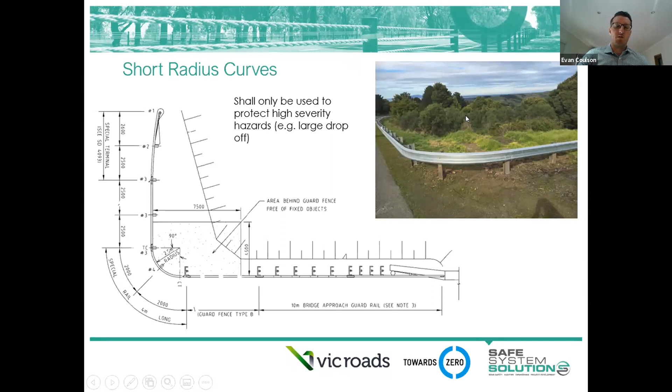Where the hazard is really severe, you don't want people going off that cliff. I guess I just wanted to highlight that these systems work by breaking and almost creating a bit of a net or a capture area. So if you're using it to protect hazards that are right here, then you just haven't protected them whatsoever. But if you've got sort of a cliff or hazards out here, then that's the amount of room that you will need.

Transitions - really mainly just going to talk about guard fence onto concrete. The importance is to do it as per, most of these are actually public domain transitions, so as per the RMS standard drawings or the Victorian standard drawings. The idea is that you slowly stiffen the system, so you can see the post spacings begin to decrease, going from a deflection of 1 to 1.5 down to less than 1, much lower, until you get into the rigid concrete barrier.

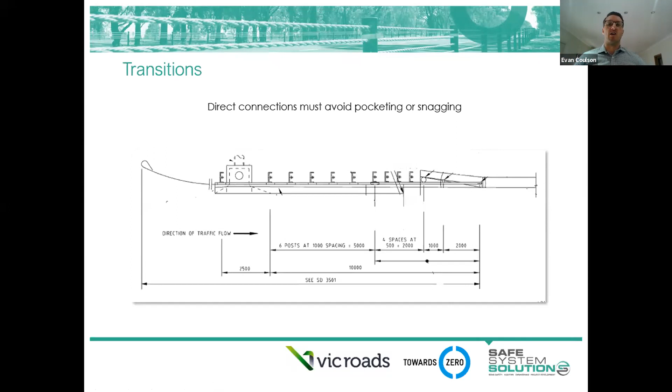None of the suppliers have really crash tested transitions other than the reverse impacts into their terminals. So the transitions are mostly public domain. Yes, the suppliers might produce a drawing just for ease, but that drawing is typically based on the public domain transition. Again, it shows sort of the purpose to redirect vehicles away from that rigid end.

And there is a new transition coming soon. There's going to be a webinar from Austroads, I think early Feb. They haven't sent out any details yet, but that's currently the plan. And they'll go through a new Austroads transition that includes a thrie beam onto a concrete, whether it's F-shape or single slope or whatever. And this will be the transition that most of the road authorities will be adopting after that.

Definitely true in Victoria, currently working on the standard drawings for it, which will mean, if it's W-beam, you have to transition down, or if it's thrie beam, you just connect straight onto it. These unique products, Raptor, energy absorbing bollard, they are accepted in Victoria. They are on the list. And I think RMS definitely have the Raptor. At the moment, they don't have the energy absorbing bollard because it just hasn't passed the crash testing.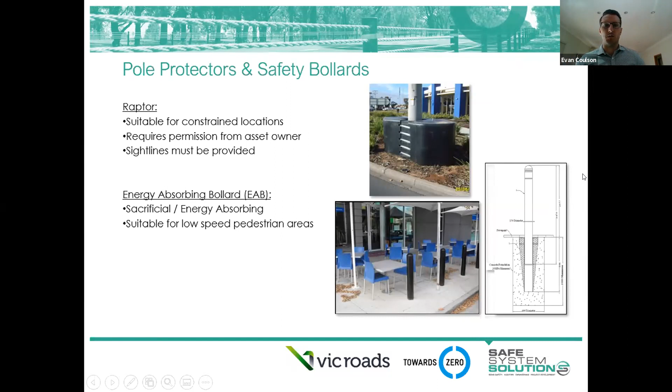Concrete barriers, quickly touch on, and then I better finish up this session. We don't have off-the-shelf concrete barriers. There are some temporary ones off the shelf, but when we're talking about permanent concrete barriers, they need to be designed for the site. Now, there might be a nominal installation where, if you can achieve everything correctly, then you can sort of install per the standard drawing. But generally, we're looking for several things.

The shape: in Victoria, we use F shape and so does RMS. Queensland use constant slope, WA use F shape, but shape is very important because that's how it redirects and absorbs the energy of the small car. Height is critical: 820 for TL3, 920 for TL4, and 1100 for TL5. Obviously, those are the minimum heights. Taller barriers would be better, but those are the minimum heights to achieve the new MASH test levels.

And then essentially that the whole system acts and is anchored such that it can redirect a vehicle. The combination of reinforcement, whether that's longitudinal bars or a cage, connections, making sure each unit is connected to the next. So whether it's a precast system or a slip form, those connections will vary. The anchorage, how is it embedded? How deep is the embedment? What's the support on the surrounds? If this is a verge, how high does the soil get placed up behind the barrier?

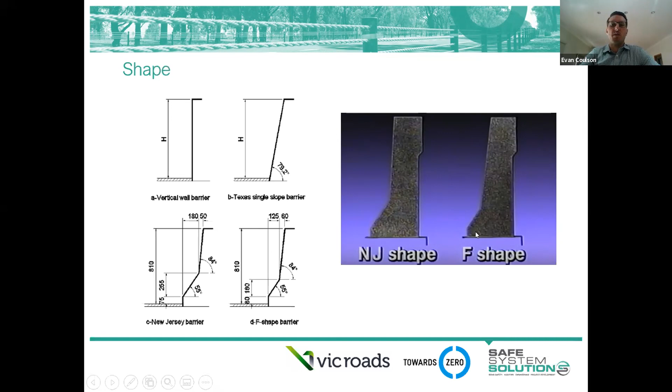F shape, why do we call it F shape? Well, they tested shape A, B, C, D, E, and F had the lowest occupant risk values for the small car. And so F shape, and you can see slight differences in angles and widths and everything. F shape was the preferred. So it kind of looks exactly the same as the New Jersey shape that everyone mentions, but they are slightly different.

Showing a bit of installation. For bridges, similar components, still the right shape, still the right height, but you also have to meet certain design loads, durability, 100-year design life, etc. Designing a barrier for a bridge is much more time consuming, and the product will generally be more expensive because it's going onto a bridge, it's connected to the deck. It needs to meet AS 5100.

So it is sort of important to identify where you need a bridge barrier and make sure you talk to a structural designer. But AS 5100 is sort of your key reference for that. There is some equivalence because they're based on the same crash tests, and that's generally the approach. But it is kind of important to note that while they're based on the same impacts, providing a wire rope on a bridge doesn't meet AS 5100. It doesn't have a design life of 100 years. It doesn't have all the requirements of AS 5100.

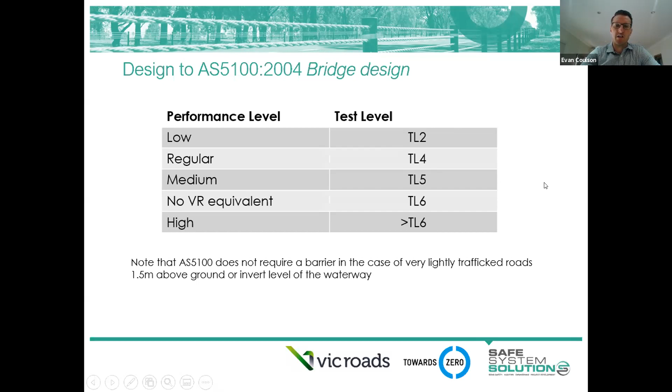And so it's just important to know while they are equivalent at a base, they're not alternatives to each other. I would highly recommend not thinking you can use a roadside barrier on a bridge because you're most likely to get turned down. And here's just several photos of different sort of shapes and designs within Victoria.

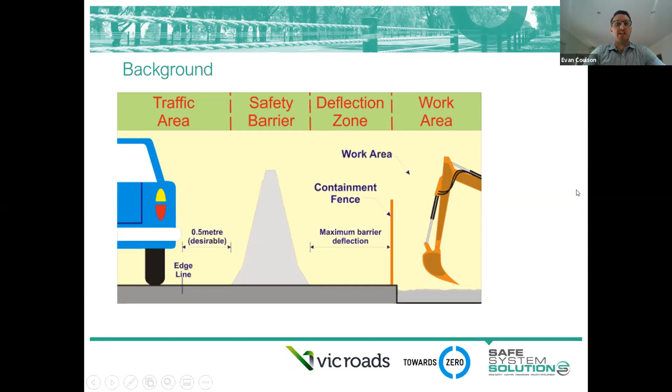So we've got the concrete barriers, very much the way you design them, the way you test them, the way they're set up on site are exactly the same as permanent. The barrier systems will need a deflection area, space to move, to deflect, and you want to have your work area, just like you would normally have your hazard, outside that zone. So all the crash testing and everything is essentially exactly the same.

When it comes to temporary, there's 4 general types. Concrete, pure concrete, generally with some reinforcement. Steel, pure steel, so generally a hollow shell, and I'll get into those. Composite, that's a mixture of steel shell with concrete ballast for a bit of extra weight, and water-filled plastic. So generally plastic without any water would just be a delineation device. The only way it comes in as a temporary barrier is if it is actually a water-filled plastic barrier. But those are the 4 categories, and there's several products in each, though quite similar.

Precast concrete. So a couple of variants, T-Lok, JJ, which you can see up here, and the DB80. Generally, the actual concrete units are quite similar, F-shape, roughly 6 meters long, sometimes 3.6 meters. And it's really the connection that kind of separates each of them. The connection also can determine how much you can bend it around corners. And here lies the challenge with concrete.

The harder or the tighter that connection is, the less the system's going to deflect, because the whole system will slide and deflect as one unit, and there won't be any bending in between units. However, the tighter you make that connection, the less you can actually bend it out on site. So again, there's this real challenge for manufacturers or suppliers.

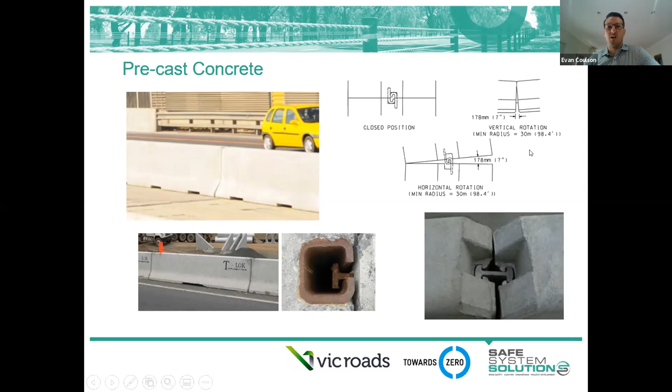Steel: much lighter than concrete, much more durable than concrete, but because there's no weight to them, they need to be pinned. The concrete barriers I showed before are freestanding, except at the terminals. All steel barriers must be pinned. Now, how often you pin them will basically depend on how much deflection you need. 60 meters is a common pin spacing that will get you the most deflection. 12 meters, lower deflection, and 6 meters, which is essentially each unit, minimum deflection.

And most of these products each have that sort of variant. They'll have a standard, they'll have an LDS, a low deflection system, and they'll have an MDS, a minimum deflection system. Obviously, the more rigid the system, the stiffer the system, the more likely a larger vehicle is going to hit it and tilt. So a lot of these systems can achieve MASH TL4 with a 60-meter post spacing because the whole barrier will deflect, the vehicle will remain stable.

The more you pin it, the stiffer you make it, the more likely that vehicle is to tip over when it's hit. And so a lot of the minimum deflection systems are actually TL3, while the normal systems, it's the same unit. It's just how often you pin it will make it TL3 or 4, and so too will the deflection change. But again, we're talking about testing worst practical cases.

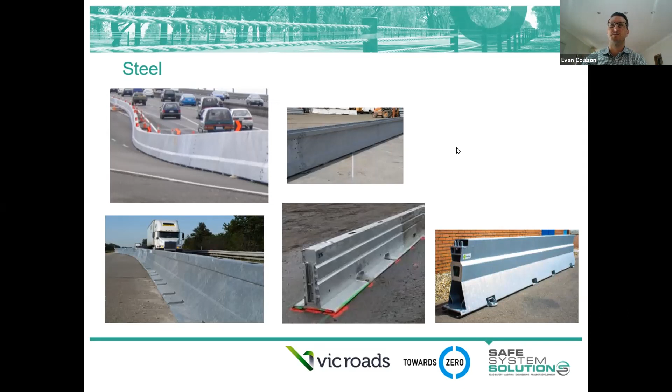Composite, very similar to steel, but they'll have a concrete ballast on the inside. The benefit of these is that, one, they're still durable. Two, they can be used pinned and freestanding because they've got the weight. You could use this unit in a freestanding configuration, or if you needed to pin it, you could come along and pin it 60 meters, 12 meters, or 6 meters. So that is the value of these composite products.

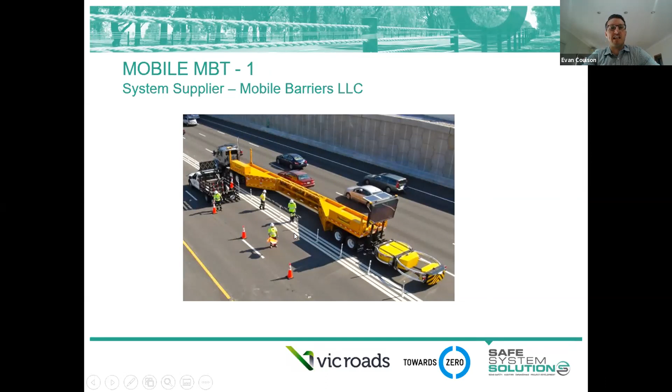Plastic water filled, not much to really say. They have changed over the years in that they've become taller. The plastic is a much higher quality. Some even have steel cables running on the inside. But like all of them, like concrete, like steel, like plastic water filled, you need a continuous length. They all rely on the weight of the system, unless it's pinned, because then it's relying on the anchorage. If it's a freestanding system, it relies on the weight.

And so making sure each unit is connected is critical. Making sure that you've got enough weight as a whole system to get the deflection you need is also critical. And finally, the other critical thing here is to have the right units on the terminal. They all pretty much use a different color for the terminals. Some units are actually identical, but they'll have holes in them so that you can't accidentally fill it with water. Whereas some others are quite different in that there's no steel cables running up here, where there are steel cables running in the actual longitudinal barrier. So it is important to use the right terminal end, which will be in the product manual.

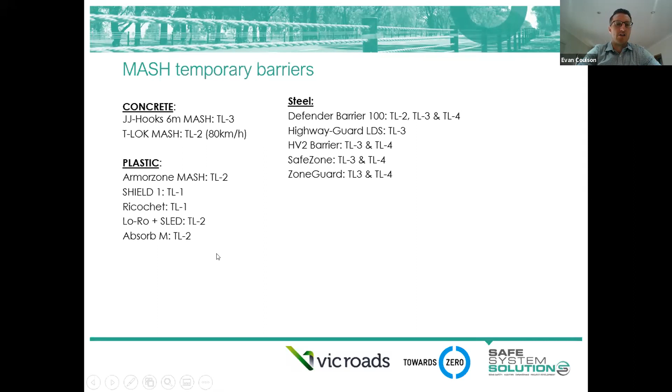That is a summary there, with a range of different test levels for each of them. The general gist, though, is concrete TL3, steel TL3 and 4, whereas plastic is really down to TL1 and 2 for the lower speed environments.

Terminals, I won't go into this. The different terminal types: your plastic gating terminals. So these can go on concrete, they can go on steel. You'll have to check the right technical conditions of use. But generally there's some sort of a connection. They are tested for this critical impact point. And I'm looking here at SLED, the Absorb 350, the Absorb M. So again, they are quite useful freestanding systems, so they don't need to be anchored to the ground.

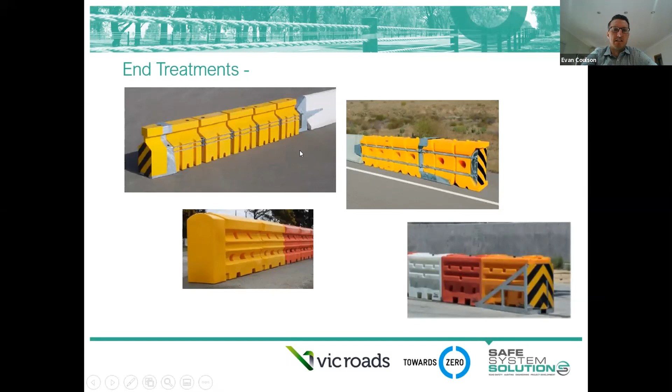And then the other main category being crash cushions, exactly the same as the previous crash cushions. However, there's generally a neater or more convenient way to anchor the system.

For example, here they come on a steel plate, which means that you can anchor the plate itself to the foundation rather than having to get in and try and anchor all the relevant sections. So again, very similar to what I've been through with the permanent crash cushions. The value of these is that, on a high speed anchored system, that's pretty much your only option.

The other thing, I guess, is on the reverse direction, it is critical to make sure that transition is correct. For a one-way road, okay, they've obviously just placed the crash cushion overlapping the front of the concrete, which is fine for one-way traffic only. But the second you've got that possibility or that potential for a reverse angle, you need to make sure there's the right connection. And each of the systems will detail that.

If the system doesn't have one of those connections, then we've tried to be clear in the TCUs that it shall only be used for one-way roads. We didn't want to exclude the fact that this works. For example, the crash cushion does work on this concrete barrier for a one-way road, so we might as well accept that. But we also wanted to highlight that this has definitely not been tested in the reverse direction.

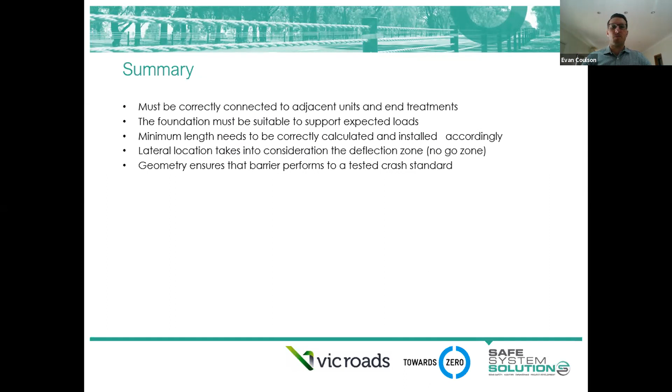Summary, foundation. Yep. If they're anchored, that's the key. Pin them correctly, anchor them correctly, because that's how they redirect the vehicle. If they're freestanding, make sure they're all connected together. Make sure you have a system length and weight. Otherwise, I think that's probably it for the summary.

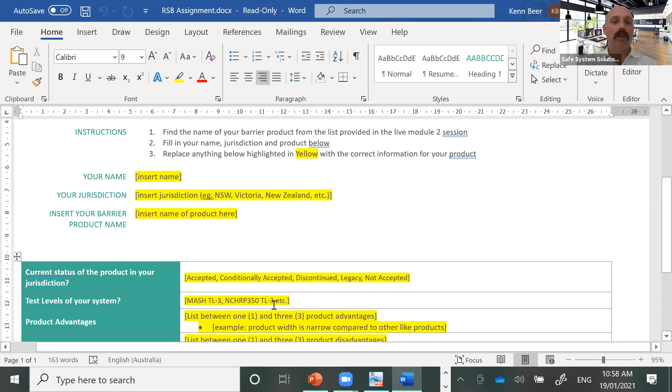So you find that product, whichever it is, you type it into here, and then you just say, what is the status of that product in New South Wales? And so you would replace the text here with what is correct. What are the test levels of the system? So it could be 1 or more. And then between 1 and 3 advantages of that product and 1 and 3 disadvantages of that product compared to like products.

So that's going to really require you to go onto the Transport for New South Wales website, the RMS website, find the product, find the sheet, have a look at it, see what its status is, find out a bit of information about it, and then just fill that out. And then you'll upload that to Moodle. So as easy as that.